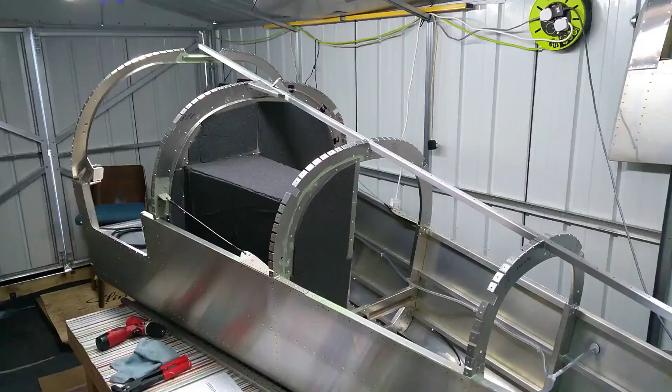Hi all, thought I'll give you another update even though it's only been 1 week since my last video. Been making good progress on the rear fuselage and there are plenty of things I think that are noteworthy, so thought I'll put another video out.

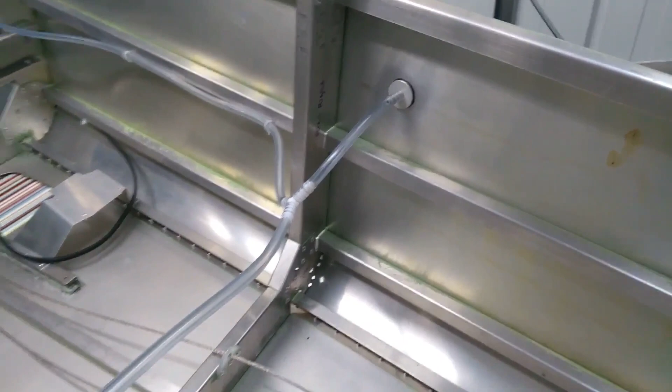So since the last bit where I had run all the wiring through for the frame before putting the skins on, I did the pitot system, used the fuel tank sealant to stick the static ports to the skin. I did that first and then attached the hose; gently heat up the hose and then they slide on quite well. Finalized the GMU 11 position.

I decided to put it right behind this large square hole where it's easily accessible and out of the way of the rudder cables and the push rod. So hopefully that won't have any interference, and I got that checked with the company that will supply my avionics.

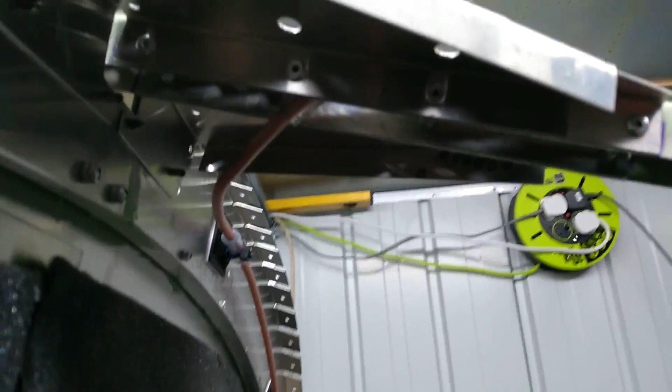The COM1 antenna, the factory has a new setup using these 3-piece brackets and a stiffener or a channel inside that long run. So that was a bit tricky getting that riveted from the side, but did that first and then installed it after that was riveted.

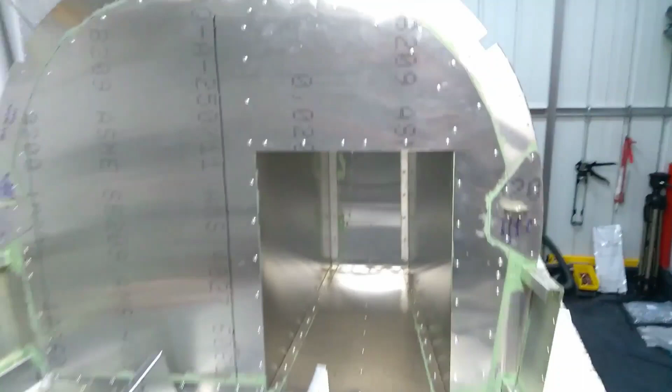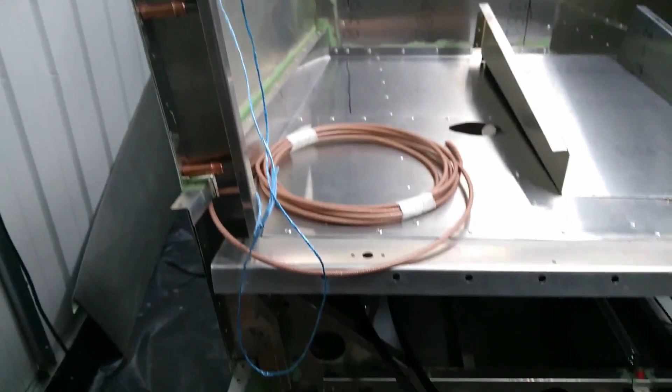And just before, on top of this luggage box, there is another piece of skin which sits behind the bulkhead. It was supplied with the kit, but the new manual doesn't show where it goes. So again, drilled it out and put that back in, put it on. The other bits, now pretty much everything was done in terms of the rear fuselage section, and it was time to put the top skins on essentially.

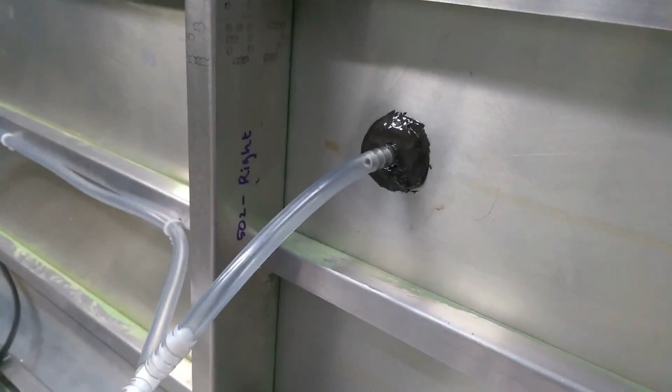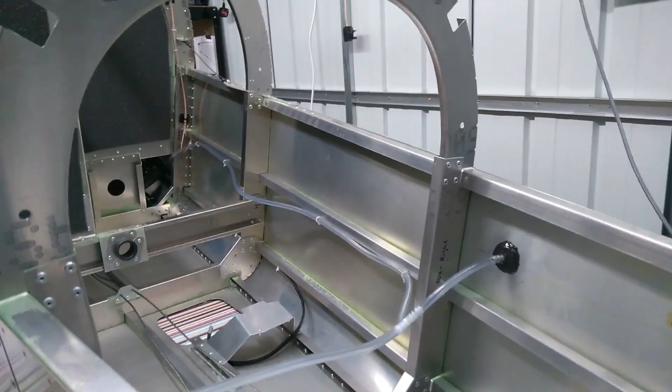Just on the static system, once the initial bit of sealant had cured, I came back and put quite a lot of sealant on the outside just so that it stays on there quite solid. If you accidentally pull it, it won't come off, because over time when you try to clean the static port, many times you might push from the outside.

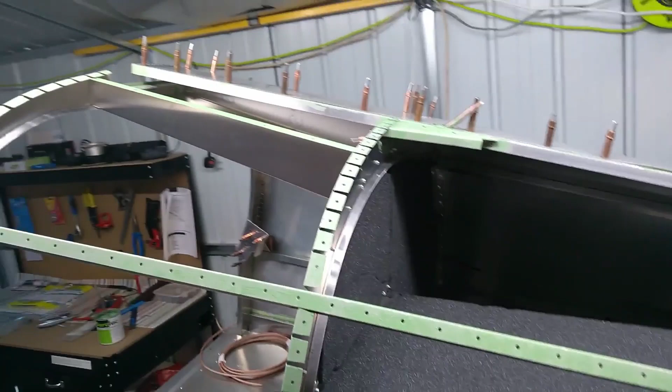Then I tried to cleco the top skins on. Also had to do all the foam insulation before that. Try to put as much foam insulation as possible on the bulkhead, on the luggage extension box and everywhere. And then did the right side top skin first. As per the manual, the left one goes over the right one. The alignment is quite good.

Again, did all the clecos in the middle, I think along that rib 3, maybe rib 4, put the clecos along that rib 4 and manipulated so that the holes match towards the front and way at the back. Also the cable tray which sits on top of the luggage, clecoed that in place to see alignment of that. Seemed to be quite fine.

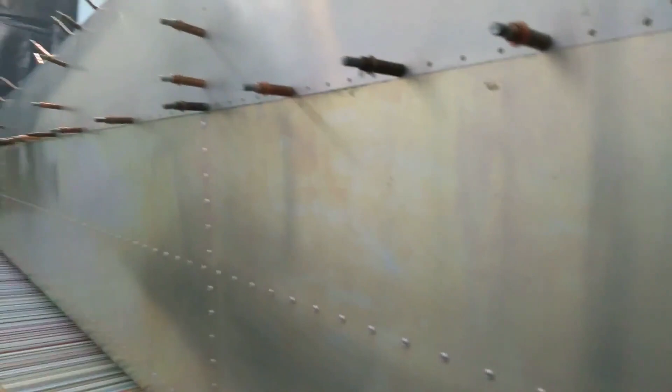On this side, pretty much put a cleco in every hole. Along that top row, it was fine. It did match up quite well, apart from the very rear section where there's quite a bit of misalignment.

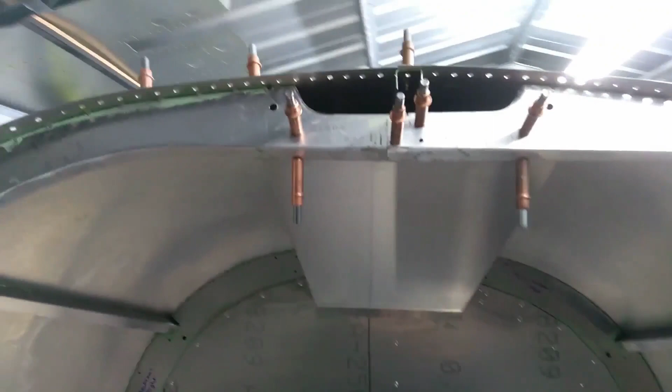Back on the cable tray, basically what happened was the 4 rivets on the rib 2. There's also a kind of L-shaped channel behind it. And when you assemble the rib 2 subassembly, it shows the flat of that is on top, but that's not right. It needs to be on the bottom to be lined up with the 2 holes to be riveted on that cable tray itself.

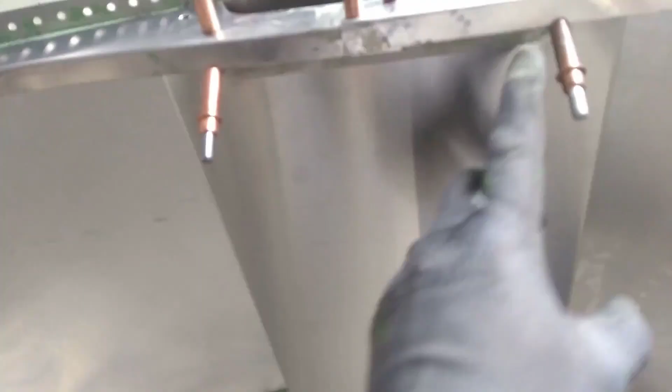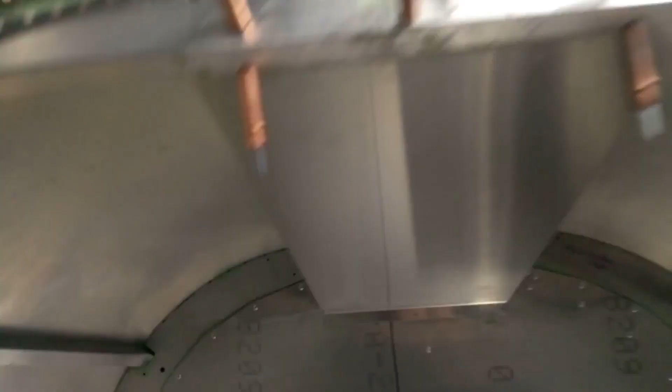So I had to drill those 4 rivets out, take that channel out and attach it to the cable tray first before bringing this thing all up, because as you can see, the access, those 2 clecos, you just can't get the rivet gun in once it's in place. So it's just a matter of trying to cleco things in place and seeing if you have access. And also at the rear end of this cable tray, none of the holes are drilled on the bulkhead, so you have to match drill those and attach and rivet it.

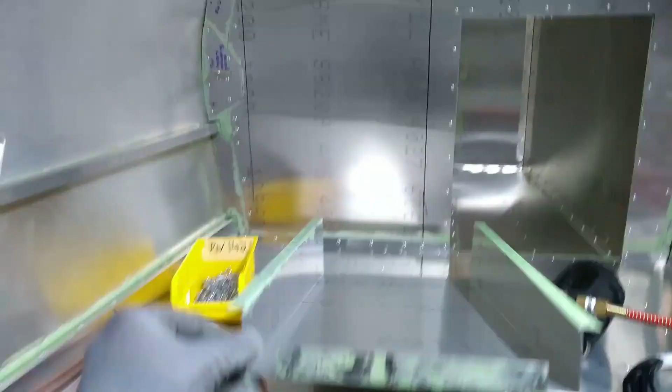So once I marked up all the holes on that bulkhead, I attached the L-shaped channel to the cable tray and then brought it up, and then it was easy to rivet the 4 rivets to complete that rib 2 assembly, and then also riveted from the top of the skin.

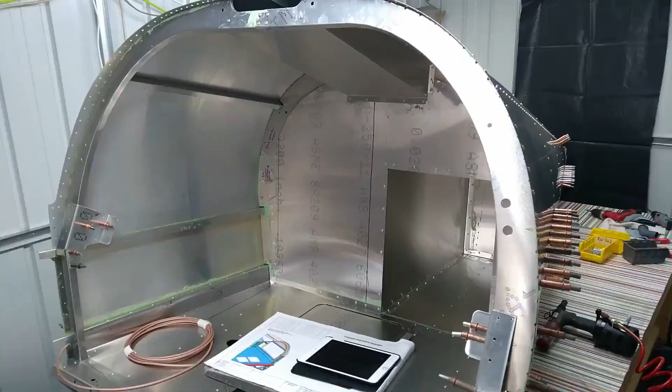Once that was done, the next step was the left side top skin. Again, that went on quite well, not many issues in terms of alignment. Again, did the same, the center side, cleco in pretty much every hole. Towards the end though, there is a little bit of misalignment, not too much that I have to completely match drill it.

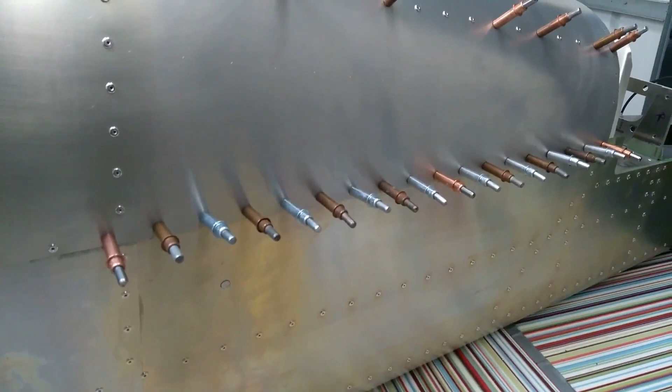So my trick here was I couldn't get the copper clecos in because there was slight misalignment, but I could get the silver ones in, which are smaller. So I put a silver cleco in each alternate hole and then match drilled the other hole, then put the copper clecos in and then took out the silver clecos and match drilled those, and that way I'm holding the skins tighter together to the longeron

and just doing as minimal match drilling as possible. I mean, you can always go one size up for the rivets to get a much tighter fit, but I didn't have too much misalignment to go one size up. So this was the end result. I think it came out quite good.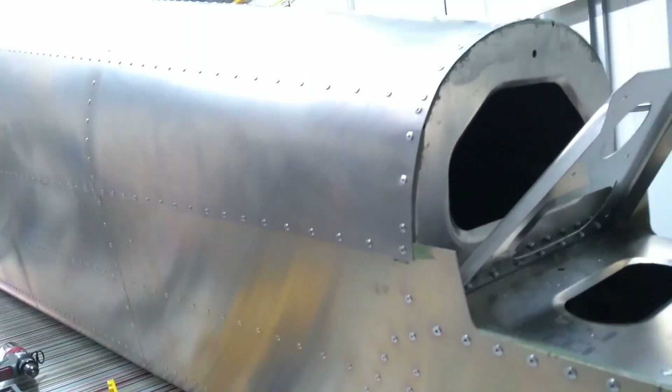So once both skins were fully riveted, it was time to work on the luggage door. I am missing one piece for the antenna mount, so I still have a few clecos on top. The door itself was pretty straightforward, and the manual has all the instructions. The piano hinge itself doesn't have any holes drilled, so you can put the door up and match drill in the correct position. I think that helps with that particular step.

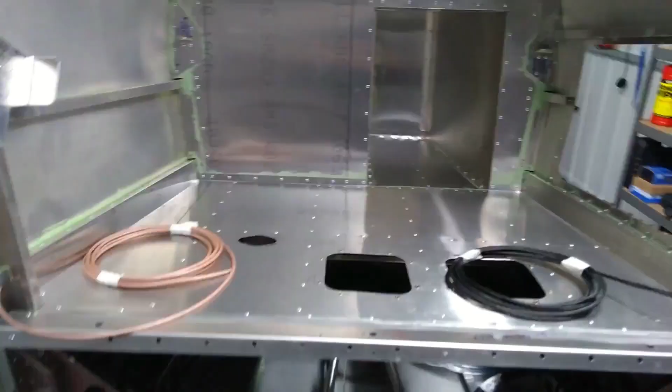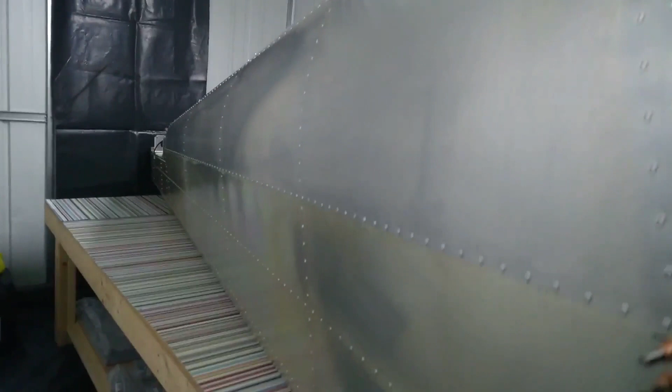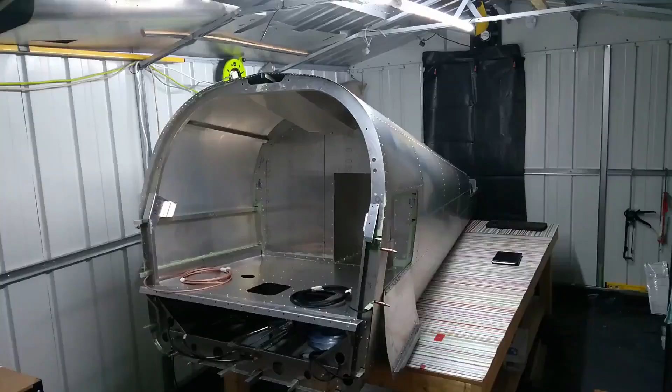Yeah, and I think once the top skin was fully riveted on the longeron and everything, it looked now quite a stable, solid assembly. So this rear section can now be pretty much completed and moved aside to make way for the center section. So this is the final stage of it when I had the door fitted as well.

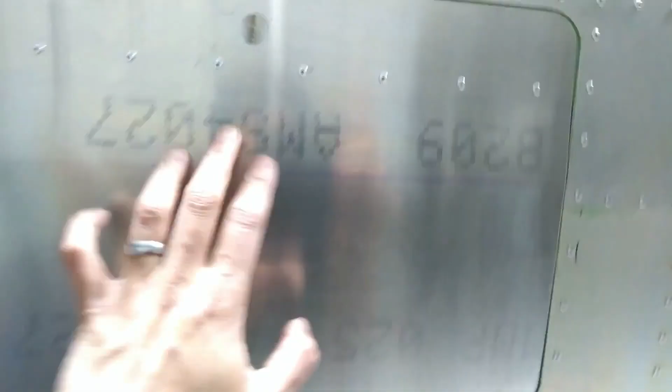So essentially, I think there's detailed instructions in the new manual about how to do this. So you first attach the hinge to the door. The door already has holes drilled in it, so you match drill the piano hinge and then bring the whole thing up and make sure it aligns quite well. It also gives you a rough dimension of where to bend the door, because that's supplied flat.

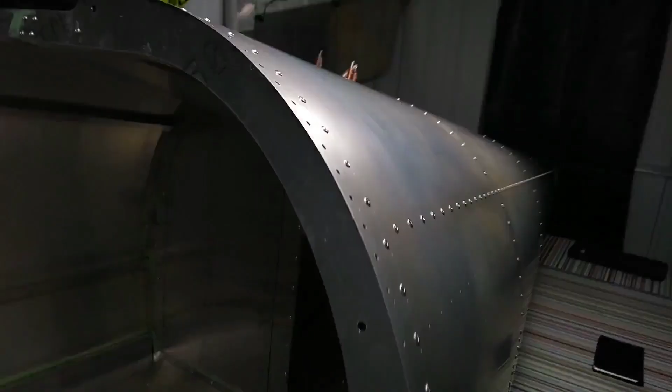I still have to do the lock, and I'm missing that antenna top plate. So once I have that, I can finish those 4 rivets on top. Plus there are also 4 riv nuts to go there where you mount the comm antenna. So plan is to slide this back. I've cut a hole in my shed at the back, and that'll give me space to move my bench back for the center fuselage. So next, hopefully in a couple of weeks time, I should have an update on the center fuselage.